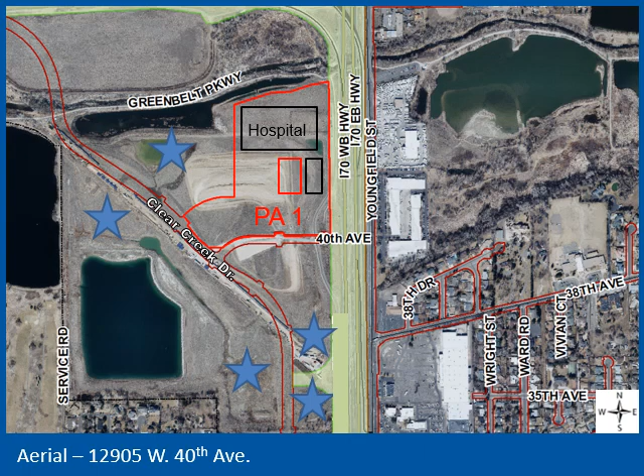Multiple sites have progressed to construction and/or completion in Clear Creek Crossing, which is not reflected here, including the hospital on the subject site, 2 multi-unit apartment projects north and west of the site, a Foothills Credit Union north of the hook ramps, a Dutch Brothers Coffee and Kum & Go gas station and convenience store at the south end of the development on the east side, a Lifetime Fitness facility on the west, and a Hampton Inn hotel.

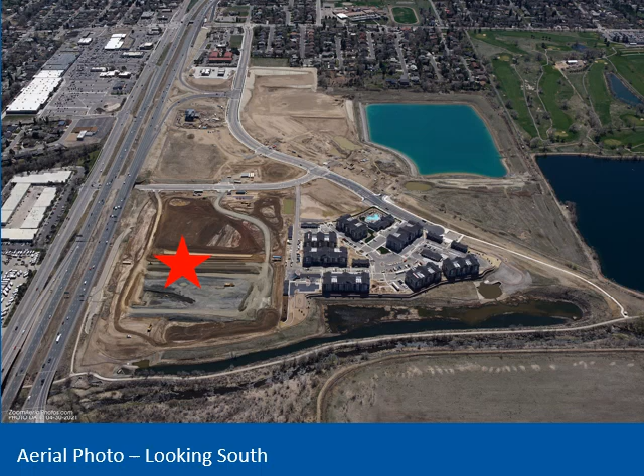This is a 2021 flyover of the site looking south. The hospital campus is shown with a red star. In this view, you can see the first phase of the multi-unit apartments, Foothills, and Kum & Go, but there's been a lot of progress since this was taken as well.

The site was zoned planned mixed-use development in 2018. The site is entirely surrounded by land that is also within the Clear Creek Crossing planned mixed-use development zoning. A new planned development was established just west in 2021 for the second phase of apartments.

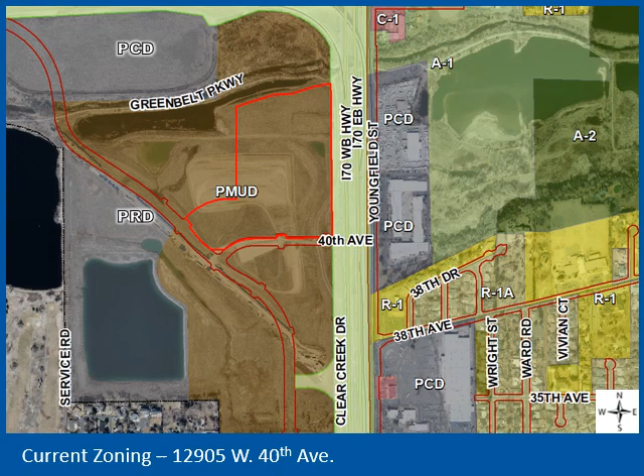The adjacent site across Clear Creek Drive to the west is a commercial subdistrict with an approved SDP application for a hotel. Retail restaurant uses are called for to the south across West 40th Avenue, which is currently vacant. The site to the north contains the regional trail and is reserved for open space. To the east is Interstate 70, which is elevated slightly above the site.

This request for SDP approval is the second step in a 2-part approval process pertaining to plan developments. The first step occurred in 2018 when Planning Commission and City Council approved the Clear Creek Crossing Planned Mixed-Use Outline Development Plan, which established the zoning.

The zone change also included approval of a vision book that establishes the intended design and architectural themes and materials, as well as a design pattern book that includes the more substantive development regulations.

An architectural control committee was established specifically for this Clear Creek Crossing development to ensure compliance with the design pattern book, third-party review, consistency across the project, and to conduct schematic design review prior to the city's planning review. It's comprised of members representing both the developer and the city. The ACC has provided their recommendation of approval.

The applicant is proposing to build a 137,000 square foot, 5-story, multi-tenant medical office building. The site is located in Planning Area 1 of Clear Creek Crossing, which is also called the Mill District, denoting this area as an employment-based sub-district in the Clear Creek Crossing development.

The overall vision for the 26.93-acre site along I-70 is the development is to create a medical campus to serve Wheat Ridge residents and the west metro community. The medical office building is proposed to be located just south of the hospital and west of the parking garage, which were previously approved by separate SDP.

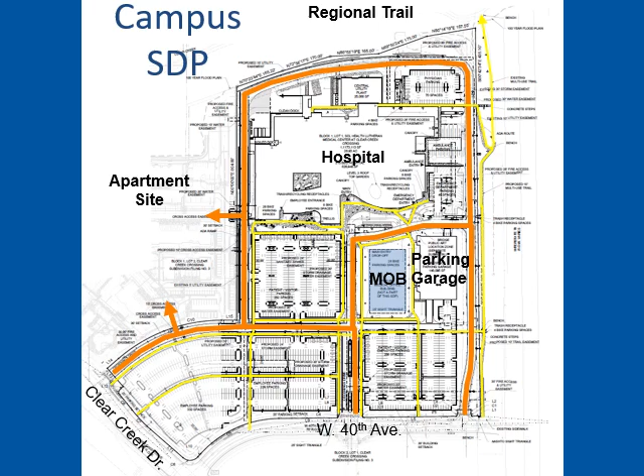The previously approved SDP for the hospital anticipated the parking needs of both the hospital and the MOB, and it has been confirmed that the amount of parking provided complies with the design pattern book for the use and size of the hospital and MOB. The SDP also complies with all grading, drainage, and traffic plans. Here's the medical office building specific development plan.

Sidewalks will surround the MOB. Vehicular pullouts are proposed on the west for outpatient surgery drop-off and on the south for pickup. The entrances are aligned with the parking lot drive aisles to the south. A utility and trash enclosure and service vehicle loading area is proposed on the southeast corner.

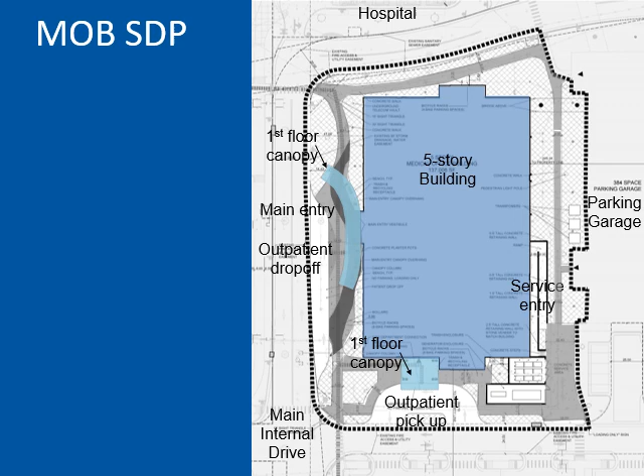A service entry is situated on the east side. Decorated pavement has been incorporated along the main drive on the west to bring cohesion with the hospital design at the ground level. The area with sidewalk on the east side will be lit and enhanced with landscaping, providing additional connection to the parking garage.

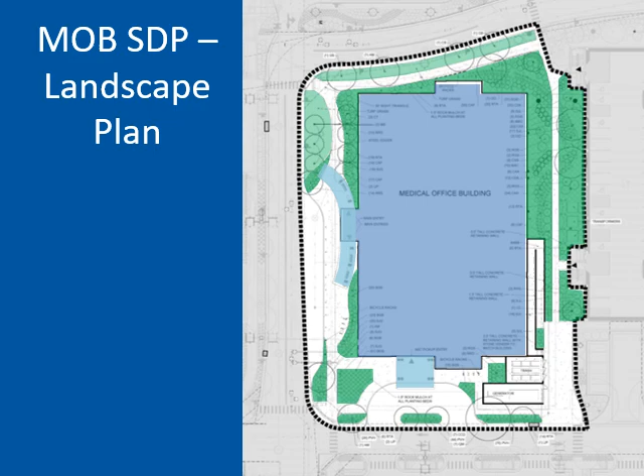Here's the landscape plan. The overall campus exceeds the minimum requirements for 20% of the gross lot size to be landscaped by utilizing parking lot islands, landscape islands, and primary and secondary frontages for trees, shrubs, ornamental grasses, and perennials. Landscaping surrounds the medical office building and reinforces the organic shapes and curved lines, utilizing cohesive planting materials.

Here are the west and east elevations. The west elevation shows the primary entry, which will be visible from Clear Creek Drive. The majority of the east elevation will not be visible from I-70 because of the adjacent parking garage. The building is proposed to be 5 stories and 87 feet tall.

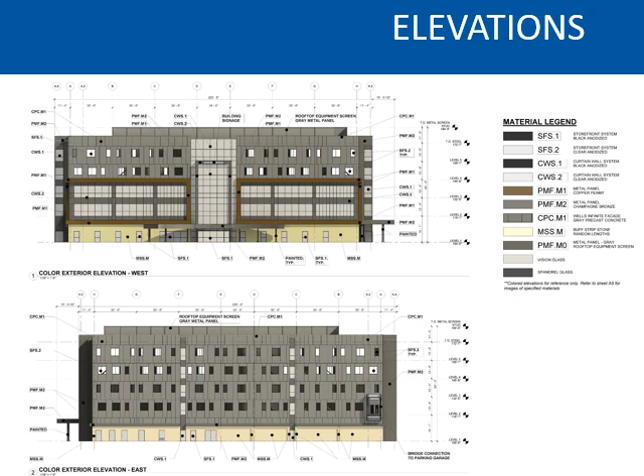The final design is cohesive with the hospital and reflects primarily gray precast concrete and a variety of bronze metal panels and accents, glass curtain wall systems, and fiber cement board, with stone veneer accents at the base of the primary entry. The architecture has evolved throughout the review process based on staff feedback, and materials provided in your packet show how the detailed standards are being met.

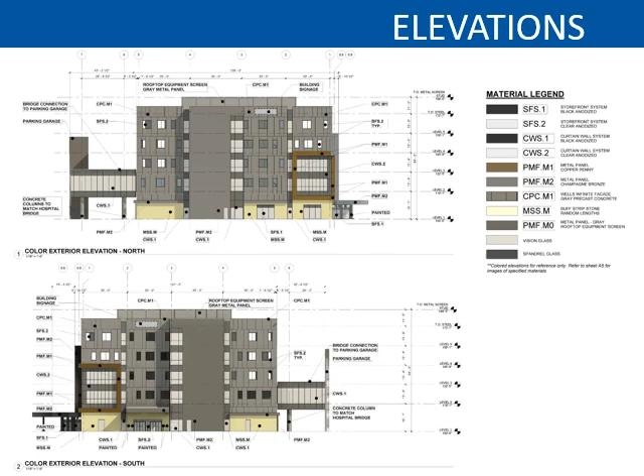The north and south elevations are shown here. The north elevation is what will be seen from the hospital looking south, and the south elevation contains the patient pickup entry vestibule. Materials are carried over on all 4 sides.

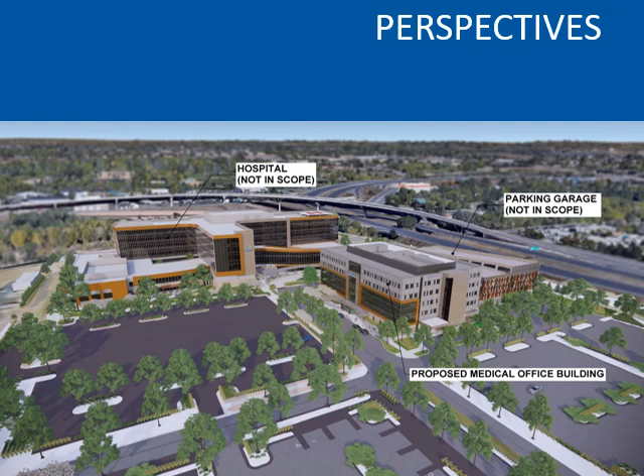Here's a perspective showing the view from 40th Avenue and Clear Creek Drive intersection. The building is articulated with different materials, transparencies, and dimensional changes that create visual interest.

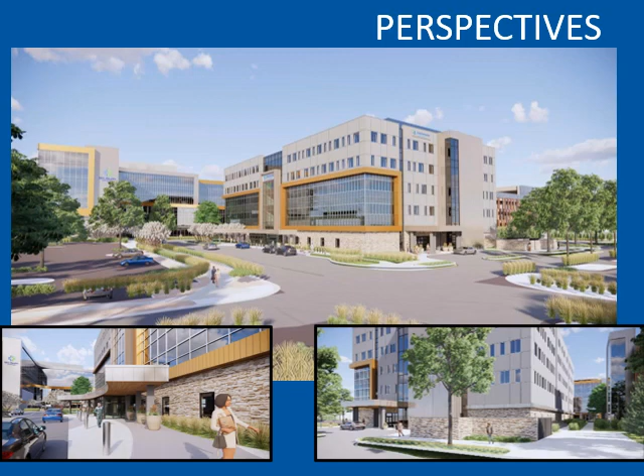Here's a zoomed-in view of the medical office building looking northwest from the main internal drive. The primary entrances are emphasized with varying roof forms, transparent doors, and a curved entry canopy that corresponds to the hospital's curvilinear features. Metal accents from the glass curtain walls and the stair vestibules add variation. Incorporation of stone on the first floor creates visual interest and enhances the ground-level pedestrian experience.

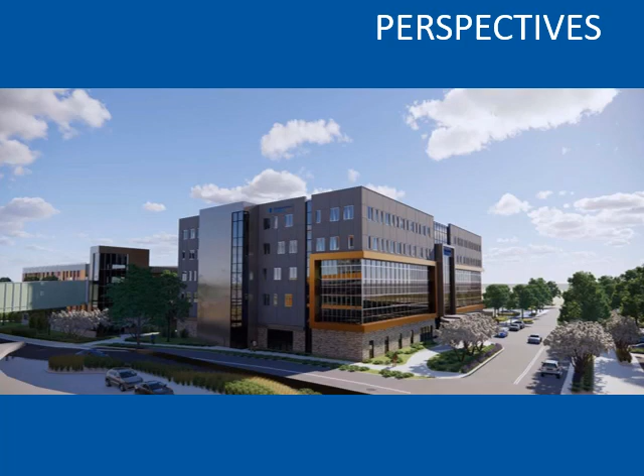Here's a view from the hospital looking south down the main internal drive and hospital entry drive. This is a good view to show transparency and projecting accents, including the northern stair tower.

Since Wheat Ridge is not a full-service city, we sent the application on referral to outside agencies, as well as completed an internal review. We did not receive objections from outside agencies, and coordination with these districts is ongoing.

Before the hearing, the property was posted for 15 days, and letters were sent to property owners within a 600-foot radius. The case was published in the newspaper, and this presentation was also available to view on Wheat Ridge Speaks. No calls or emails have been received to date.

Staff finds that this SDP is consistent with the ODP and is in compliance with all standards set forth in the ODP, Clear Creek Crossing Design Pattern Book, and City Code. The SDP is consistent with the purpose of a planned development, and all agencies can serve the property. Ultimately, staff is recommending approval with conditions as listed in the staff report.